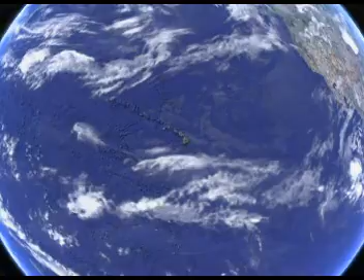As we move forward into the 21st century, our planet faces ever-growing environmental challenges. This is especially true for Hawaii, home to one of the world's most unique and vibrant ecologies. This relatively small chain of islands houses a vast and complex ecosystem that is being tested by patterns of human consumption. Because of its relatively small size, landfill space is a serious concern here.

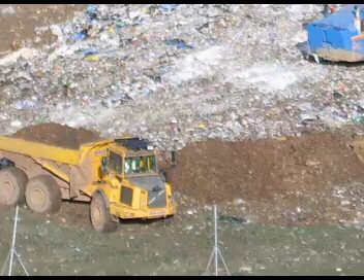Landfills not only eat up precious space, but also contribute heavily to greenhouse gas emissions and pollute the ground and surface water with toxic leachates.

And as demand for electricity grows, Hawaii, like the rest of the world, also faces the accompanying problem of fossil fuel emissions. Not only are they a source of pollutants and greenhouse gases, but 90% of Hawaii's power is imported from other places in the form of fossil fuels at a significant economic cost. The time has come for Hawaii to address these issues in a strong, intelligent, environmentally sound manner.

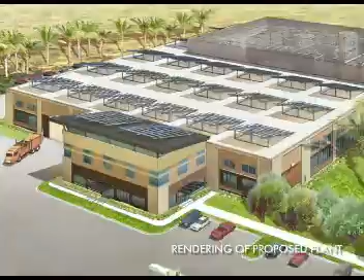Conversion of our municipal wastes by gasification is a solution that tackles the problems that Hawaii is facing in a responsible, straightforward manner. The idea of converting municipal waste into a form of energy is not new. The first industrial-scale incineration plant was put into operation in the United States in 1975 and is still in operation today.

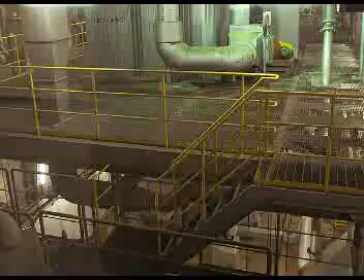And while this shows the economic viability of turning trash into energy, the process of incineration presents a number of problems. Combusting unsorted municipal waste releases harmful toxins such as dioxin into the environment, and the cleanup process can be dangerous and costly. Fortunately, since 1975, dramatic advancements have been made in waste-to-energy technologies, and we have now arrived at a safer alternative to incineration called gasification.

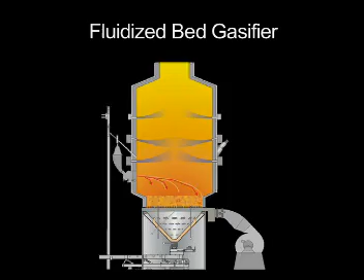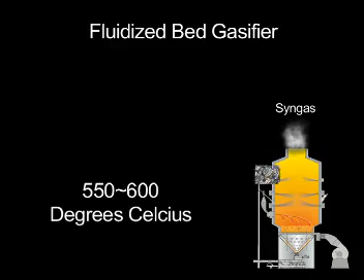An easy way to understand the difference between incineration and gasification is to think about the difference between burning something and baking it. By cooking organic materials at a high enough temperature using specialized equipment, we derive a substance that can be used as a substitute for natural gas, called syngas. This gas can be produced from just about any organic material, including biomass and municipal wastes.

In gasification, the waste is pre-processed to remove hazardous and inorganic materials before being fed into the gasifier. During this pre-processing, recyclable materials are removed and sorted. Bioenergy Hawaii will be working with local businesses to responsibly reuse our reclaimed materials instead of those materials being thrown into the Pu'unahulu landfill. Another benefit of this front-end processing is that it ensures a more consistent fuel stock and energy output.

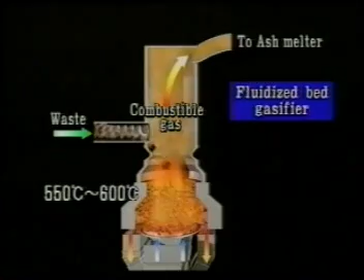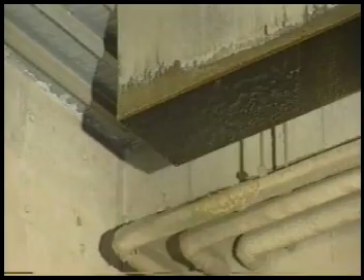Once the waste stream is purified, it is fed into a gasifier where it is baked in a bed of bubbling fluidized sand and converted into syngas and fly ash. The fly ash will be mixed in concrete and used in construction applications.

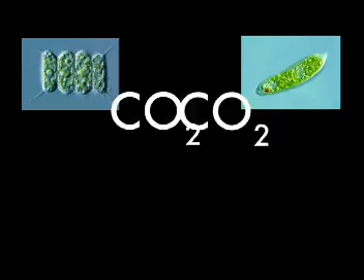The combustion of the resulting syngas burns as cleanly as natural gas, combusting into water and carbon dioxide. Carbon dioxide, of course, is a greenhouse gas, but certain algae consume CO2 and produce more algae and oxygen as a byproduct. Bioenergy Hawaii plans to sequester the CO2 in our algae bioreactor to manufacture algae oil into a biofuel.

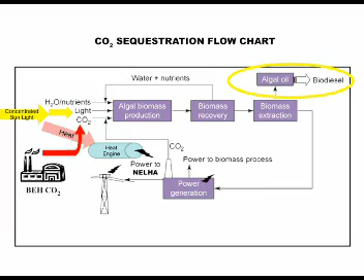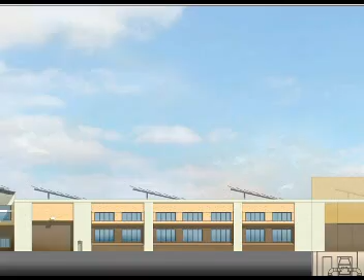Unlike incineration, gasification can work in harmony with the surrounding community while providing a safer and more responsible source of energy while slowing the reliance on landfills. Bioenergy Hawaii has investigated over 40 different waste-to-energy systems in our search for the optimum process for the state of Hawaii, and we have found fluidized bed gasification to be the ideal solution.

There is much activity in the waste-to-energy field, and our commitment is to provide the best technology. We will continue to pursue and investigate these new technologies. There are many benefits from Bioenergy Hawaii's waste-to-energy project, and the time is right for NELHA and the state of Hawaii to create electricity from our community's waste materials.

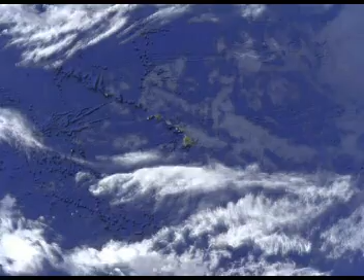As we move into the age of renewable energy, Bioenergy Hawaii represents one of the most economically viable and environmentally responsible possibilities for creating a carbon-neutral energy economy.